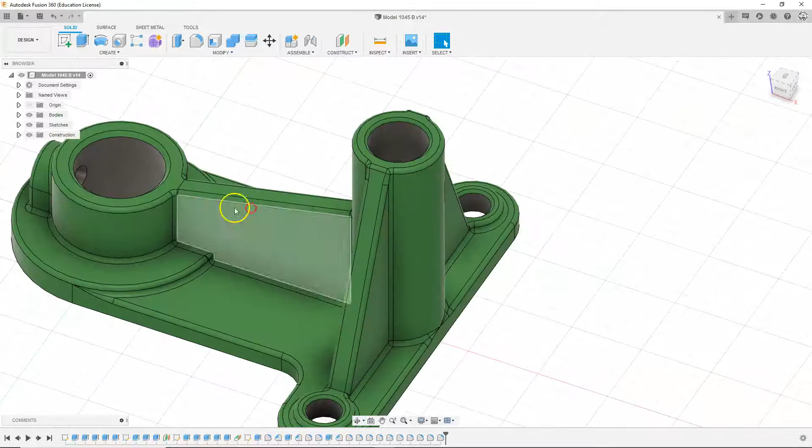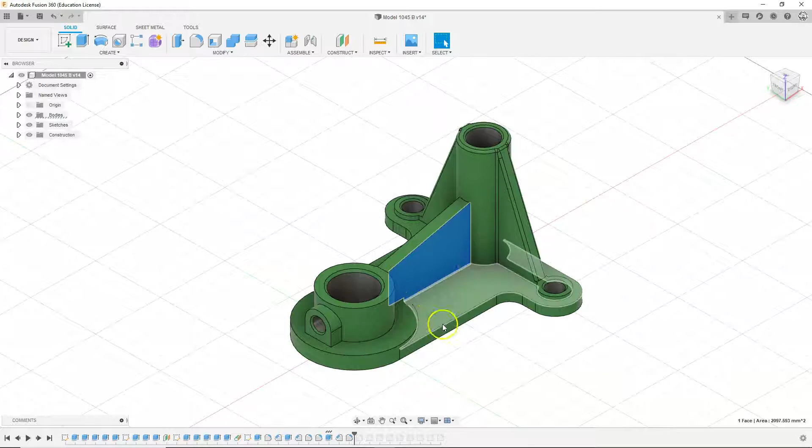One of the things I didn't like about my first try was that I couldn't get these fillets right, and you notice they're a whole lot prettier now. So what I did is I went back in and deleted all of these fillets back to the beginning. I still did these all the same way on this tower, but instead of clicking this face and adding fillets to everything on that face, it kind of does everything, and the computer tries to calculate all those things.

So what I did is I just did this vertical fillet right here, and then I went through and put all these other ones in, and it worked a whole lot better. But I got stuck again when I tried to do other things.

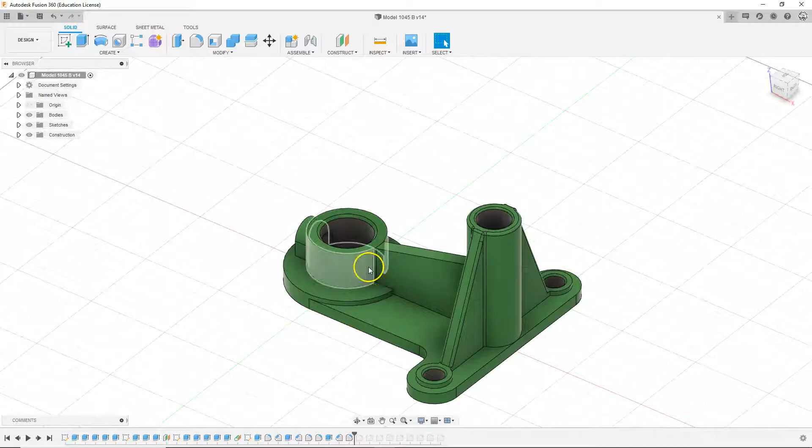So I found out that it's helpful to do all of these vertical fillets between this one and this one. So I did that one, and then the next one I did was back here, and that's the one that I just did, those two. You can roll the timeline forward, and I did all of these.

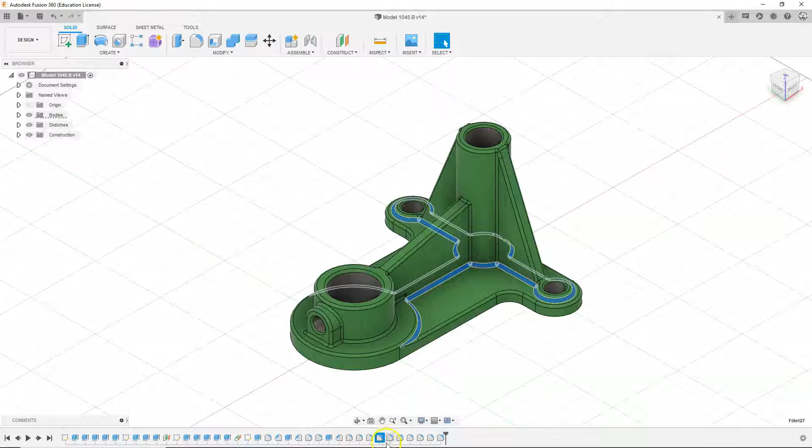So I started doing all the vertical fillets, and then I went in and started adding some of these horizontal ones, some more horizontal. It turns out that when I did all these horizontal ones after the vertical ones, nothing freaked out and threw a fit.

So I got my fillets a lot neater by doing this triangular one, like I showed you. I did these kind of vertical ones first, then the top, and then all the other horizontal ones. So that was a huge help.

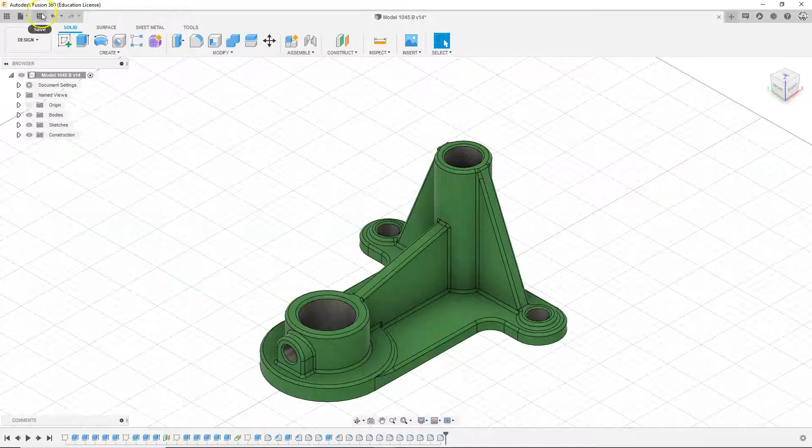The next thing that I worked on was getting the drawings better. So we'll go ahead and start this drawing from design and hit OK.

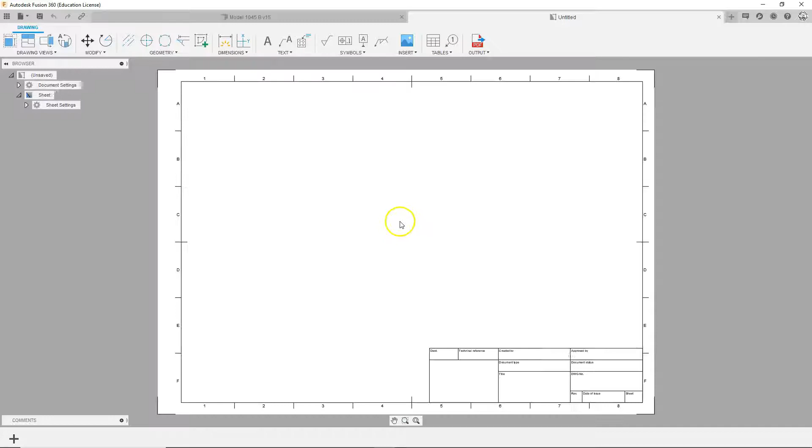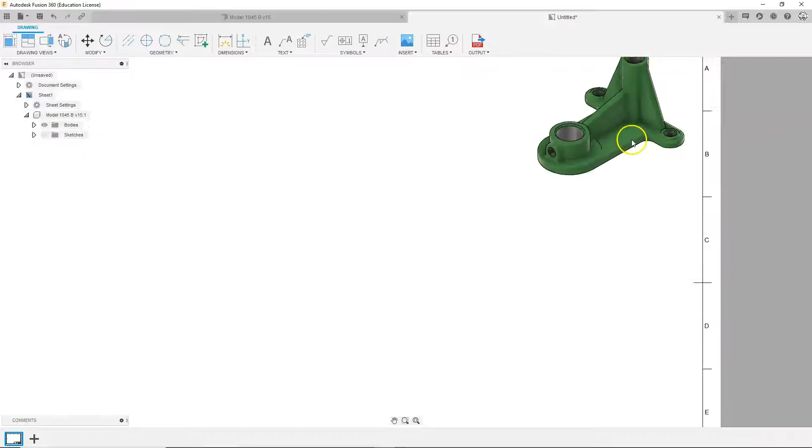I changed up the way that I positioned the drawings. It's just not going to work the way they have theirs in the example. So we'll still do our northeast shaded for our first one. But theirs has got all the fillets, and right now our tangent edges are off. So if I hit OK, and that goes in there, you can see that a lot of these are just smooth, and there's no edges. So we can click on full length fillets, and that adds in where all those fillets are.

The next thing we can do is click on our base view. We'll put in the top view. We'll stick it right here. And I was doing it right the first time, I just wasn't patient enough.

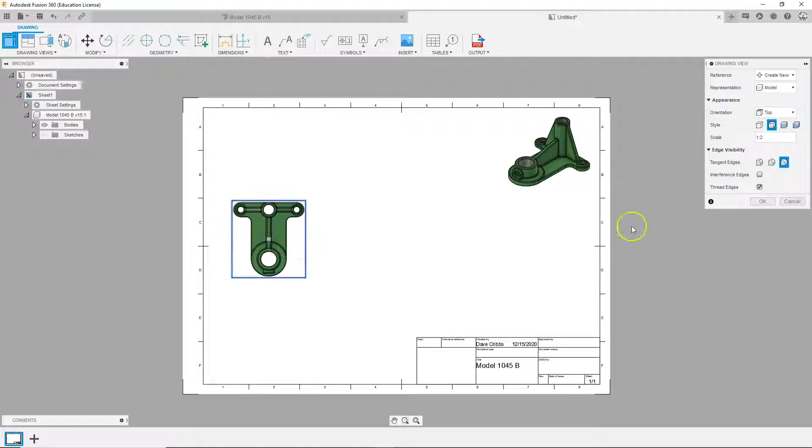When you click rotate, you have to select the object, and then come up here to tell it to transform. I did the center as my base point, and then I wanted to rotate this way, but whenever I'm over here, it sees that as 0 degrees. So I just had to keep rotating around, and I had to pause for a second to let my graphics card catch up. And that's the orientation that I want.

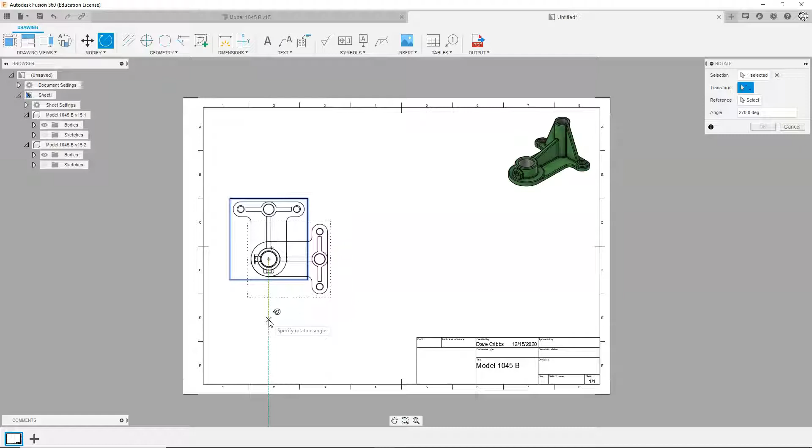So I'll click and put it there, and then once it's placed, you can click and drag it wherever you want to.

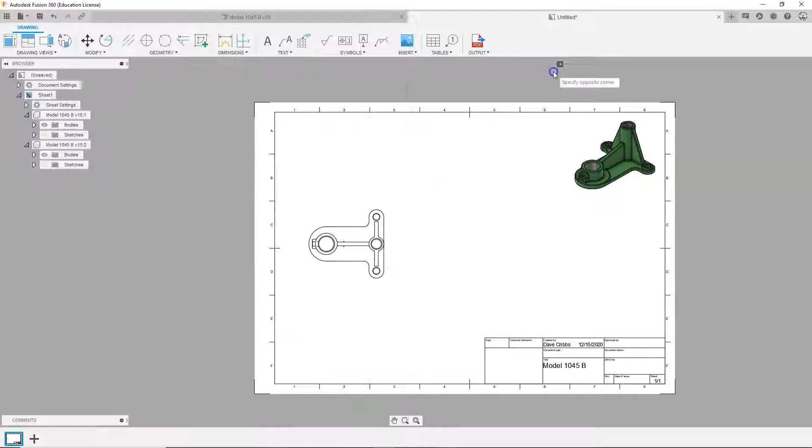The problem that I have now is that I'm missing a couple of these circles on the original drawing. The original PDF has got several more. Let me go half screen now. On the original PDF, if I look at this top view, you can see I've got all sorts of circles, and then on mine I'm missing a bunch. And the problem is...

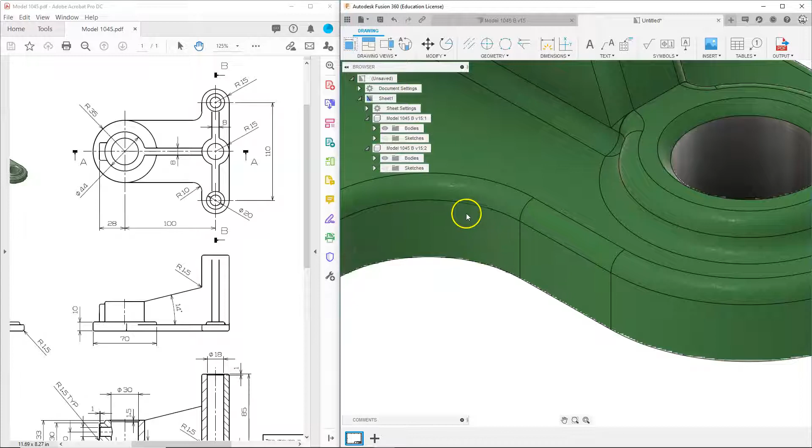...that on these fillets, this is the top flat edge. This is rounded over, and then it meets the other fillet the other way. So there's no vertical face, so Fusion doesn't see that as an edge. It sees this as an edge, and we'll draw it in, but it doesn't see that as an edge. So when we're looking at this drawing, we're missing some circles.

So what we have to do is look here. This one is my original base view, and this is my next base view. And what I'm going to do is come down here to the sketch folder, turn sketches on, and turn on sketch number 1.

And when I do that, it adds in that circle, the one that's filleted on the top and bottom, so it's really smooth and disappears. Same thing right here - this is the top and bottom of those circles that get filleted as well, and they kind of disappeared on the original drawing. If I take those away, you can see I've got the chamfered top of the hole, but I don't have the top or bottom of the hole because it gets all filleted together and it's all nice and smooth.

So when I turn on this sketch, it does not only the body, but it also adds in the sketch. So you can see I've got my straight lines here that eventually I filleted out later on, but we're just going to have to leave those in.

So I think that was the biggest problem we had. A lot of folks were having problems as they click dimensions - they're having trouble getting the radius as they move their mouse. It doesn't lock on to that radius, except every now and then you get lucky. All you need to do is zoom in a lot closer, and that should help put in your fillets.

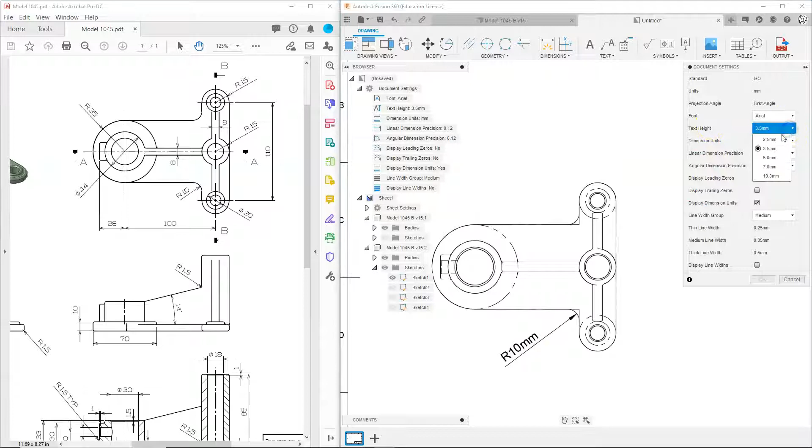If you're not getting millimeters, come up here to document settings and make sure this is checked - change units, you want this box to be display units. And I found as I'm trying to squeeze all these dimensions in, these numbers were getting too big, so I changed my text height down to 2.5 millimeters. When I made these a little bit smaller, it was a little bit easier to fit things in.

Okay, and then with that, you can keep adding in more base views.

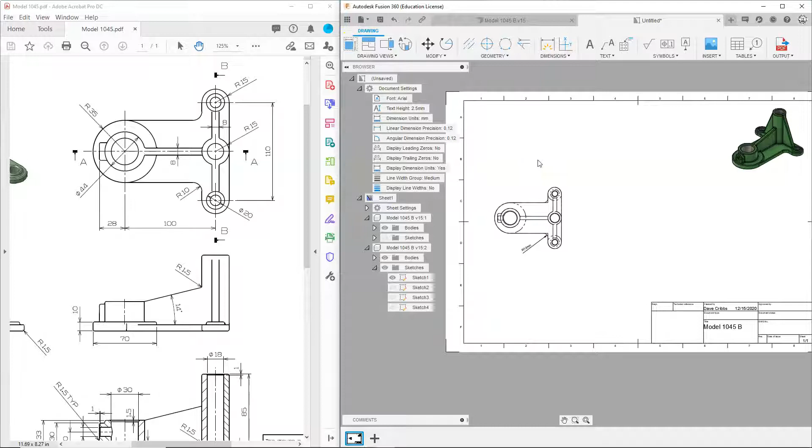So this time - oh no, this is where I want to do it, sorry. That's the front view, the right view. We can put it down here and say okay, and that's got hidden edges.

And in their drawing, they don't have that, so we can go ahead and just do visible edges. Now, once again, it's kind of missing that vertical line. That came from an extrusion, so I can't do the same trick here where I turn on sketches - that's not going to help us out.

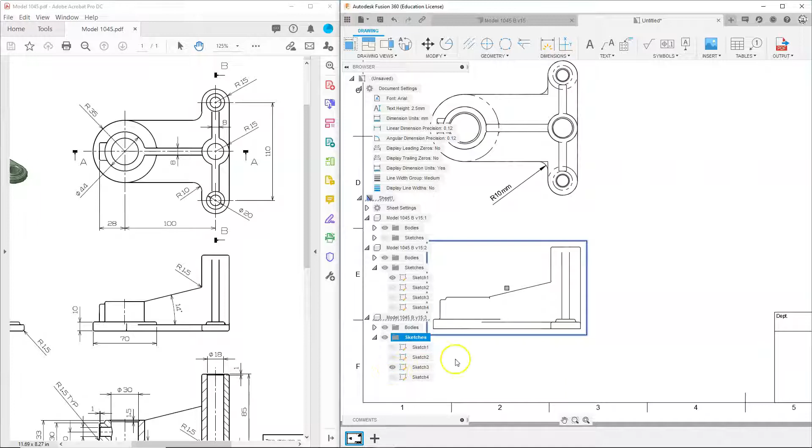It's going to put those lines in, and here it just puts way too many lines in, so I don't think that's helpful. So we just can roll with that one.

The sketch up here will be the A to A section. The one over here will be the B to B section. So I can do that real quick.

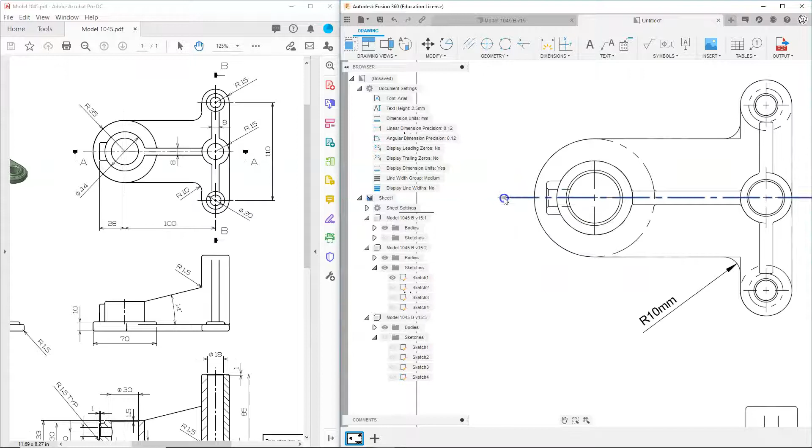Let me put the center marks in my circles, and then I can do the center line - go from this edge to this edge. Get out of the center line tool, and then I want to extend it, make sure it extends all the way past my body. And once I've got that large arrow, I can do the section view.

And we go from this point to this point, hit the check mark, and then I can come up here - and that's my section view.

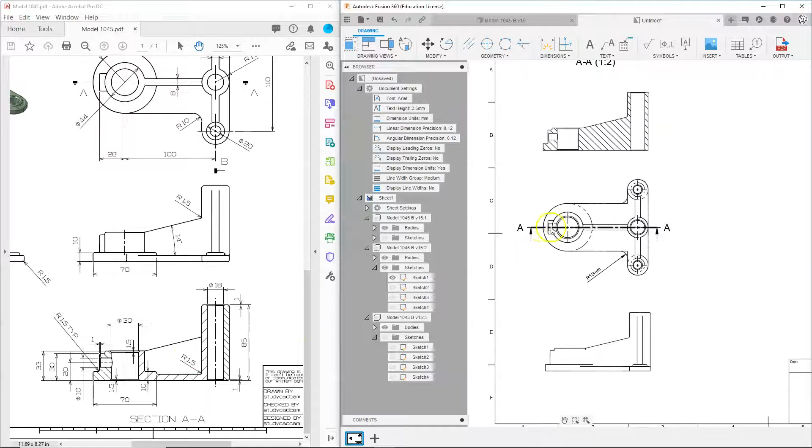Okay, theirs doesn't have this shaded, or doesn't have hatch marks in it, but I think that's wrong. If this AA is going through the center, like they're right here, then that should go through that centerpiece, and that centerpiece is most definitely solid. So I don't know why on theirs it's not showing up with hash marks - it absolutely should. So I'm good with this.

That's our AA drawing. I can do the center line - same thing, I'm going to pick one edge, then another edge, and it does the line. I'll hit the escape key on my keyboard to get out of that tool.

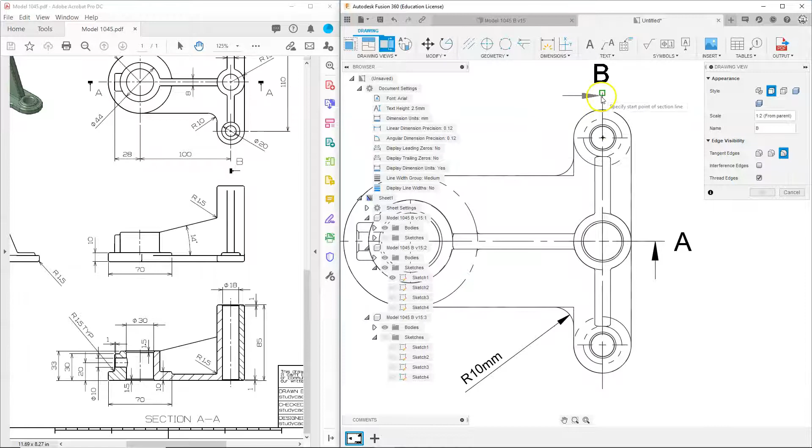And then I will select that and just make sure it goes a little bit further - the line's got to go all the way through the model for the cross section. So then I can grab, and this is my parent view, and grab those two edges of the line and hit the green check mark.

And then over here will be my other view. So those are - I've got these two cross-section views right here, AA and BB.

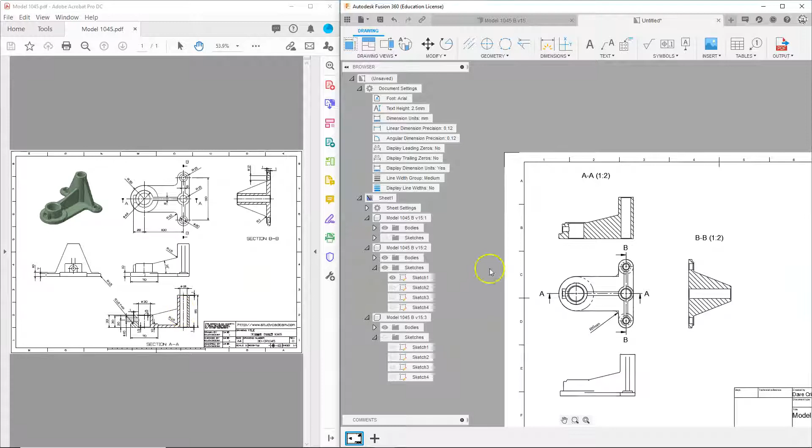I've also got the top view, and this side view, so I need this front view. We'll put our last base view in and go ahead. I'm going to put it down here so it kind of matches up with this one, and stick it right there. There's not a ton of dimensions on that one. OK.

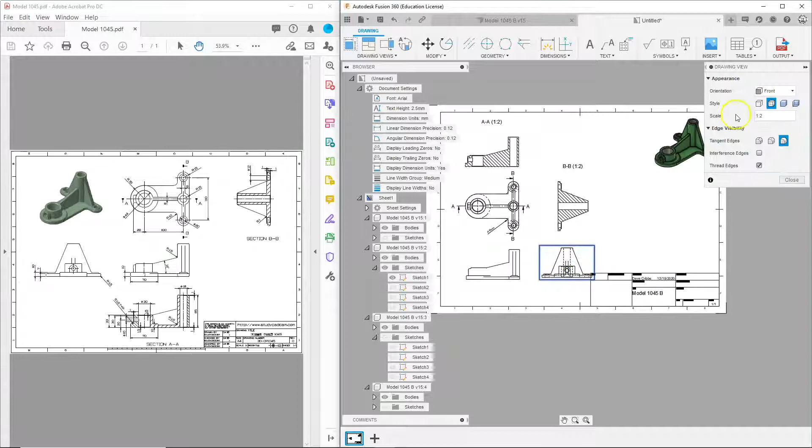Same thing, they only did visible edges, so I'll match that. There's only a couple of those as well. You can move these up a little bit to give yourself more room, but you want to try to have your views lined up as close as you can.

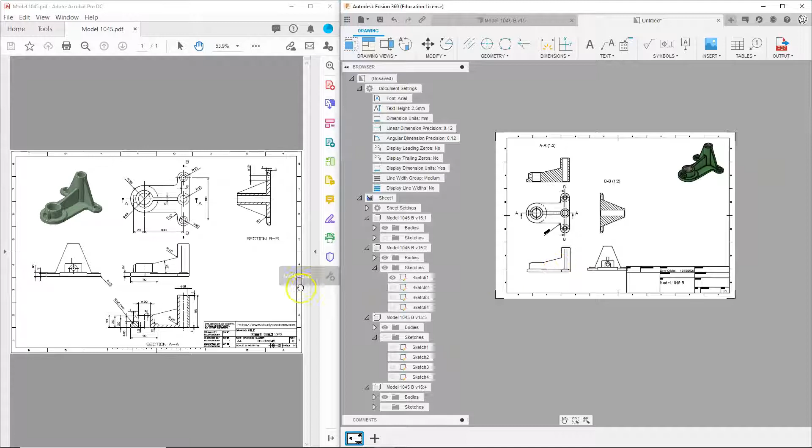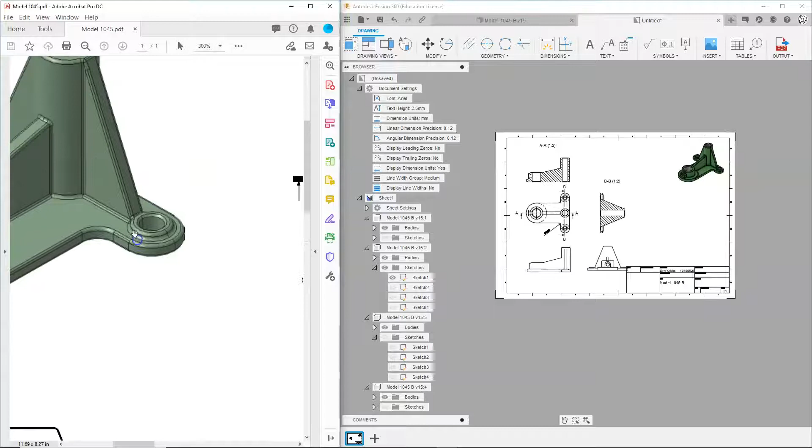The only thing I did really different on this sketch - everywhere they've got all the fillets as 1.5 millimeters, but all of a sudden right here at the base of this thing, they say it's 1. I don't know if that means just, and they're drawing so terrible, I don't know if it's 1 or something else. I just left that as 1.5, the same as everything else.

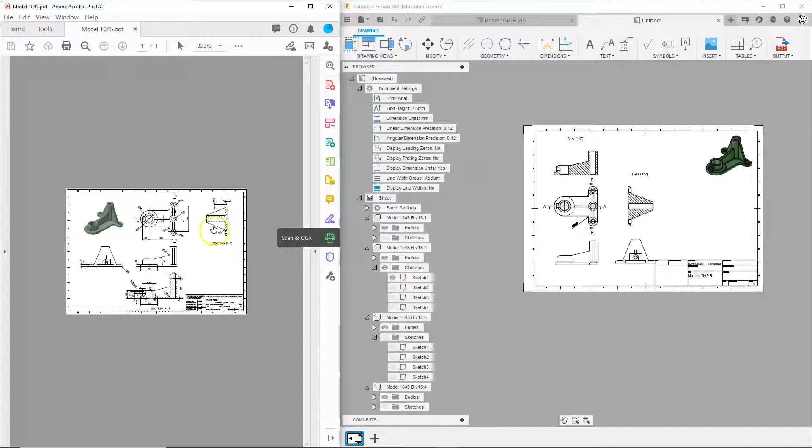When I redo this drawing like this, that 1 is going to go away. So if you did it 1.5, that's great. If you left it as 1, that's great. If you want to change it to 1.5, you can do that as well.

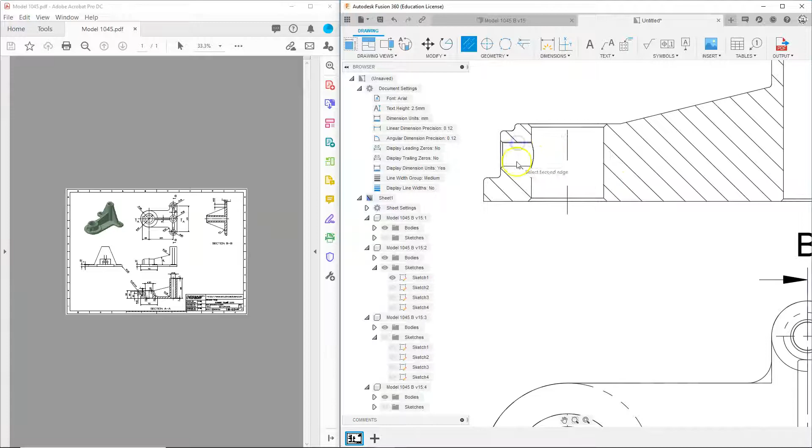Except for doing all the details, I'm not going to go through and put every dimension on here. Some of these are a little tricky. You can put the center lines there and here for those. I know this edge was a little bit hard.

So I'm going to get the 20 right there from this edge to, I think it's the top. No, it wasn't the top. I remember it was 30.

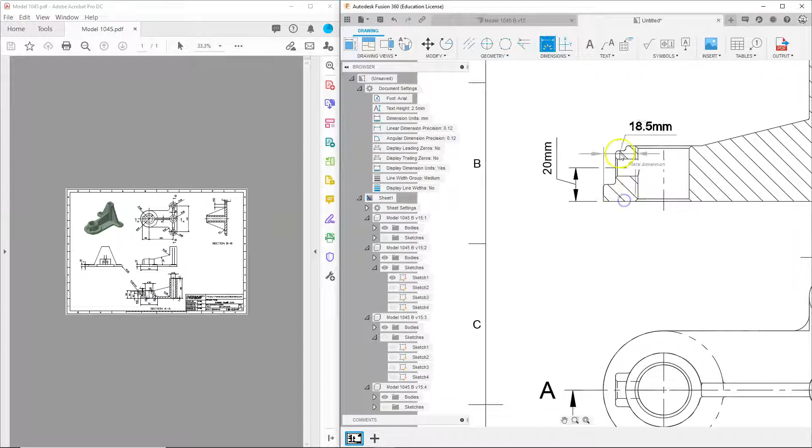So the biggest problem is that this is so small, it's hard to get what you want. So I just zoom in really big to get what I want.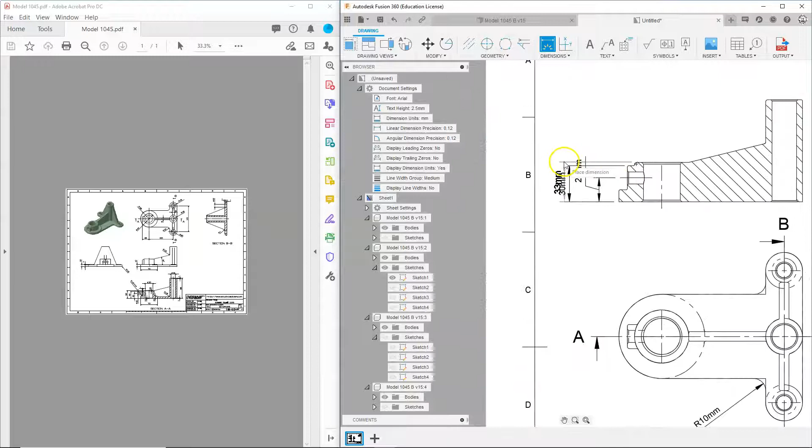That's 30, and I remember from here to the very top is 33. So once again, I want to grab that edge. Just a lot of zooming in to get specifically what I want.

I think they had another one where they had this diameter. I'm going to place that, but grab this 10 and kind of move it down here where I want it. This just has a 10 millimeter.

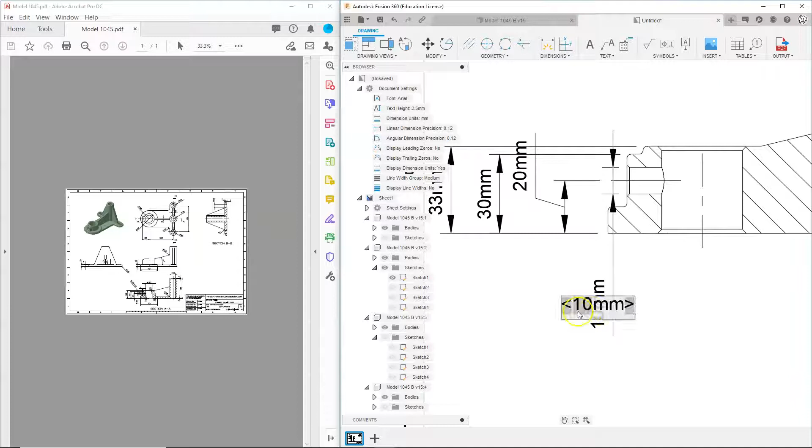If you want to add a diameter to that, you can double click the 10 millimeters, then use the arrow keys on your keyboard to get the cursor right there at the front. Insert - I double clicked to get that editable field, then click on the insert symbol, and that's the diameter symbol. Close, so I can get the 10 millimeters like they've got on here.

So they got the diameter 10, the 20, the 30, and the 33. So I've got the diameter of 10, the 20, the 30, and the 33.

Same thing, you can zoom in to get these chamfers, try to put them out of the way. There's one here at the bottom that they've got marked as well. It's going to put them where it wants to, and I just spent a little bit of time clicking on them and then dragging that gray rectangle to kind of get them out of the way a little bit.

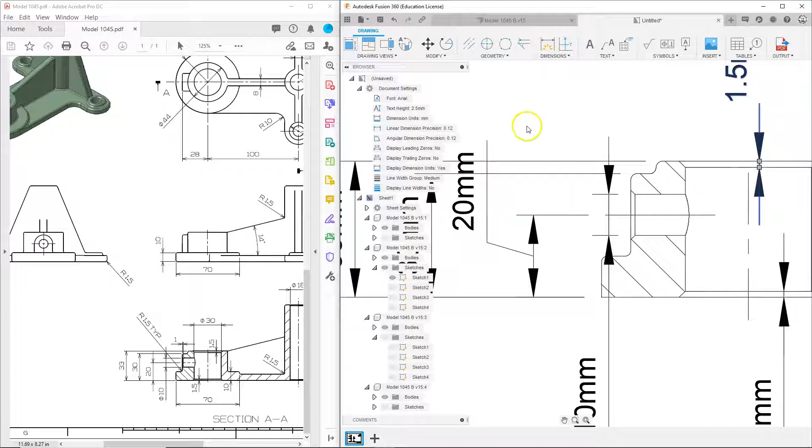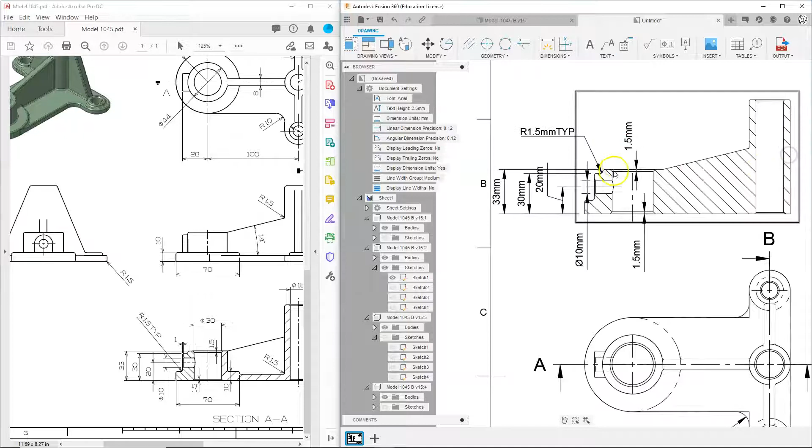You can add in a little text box right here. Zoom in on that edge and come up, and that's where you can type in capital R, 1.5 millimeters, TYP means typical. So if there's a fillet that's not labeled, you can assume that it's 1.5 millimeters.

They've also got this diameter of 30, so we'll go ahead and finish putting that in. I'm going to grab this side and that side, and once again, it gives me just a plain old 30. It doesn't give me a diameter of 30.

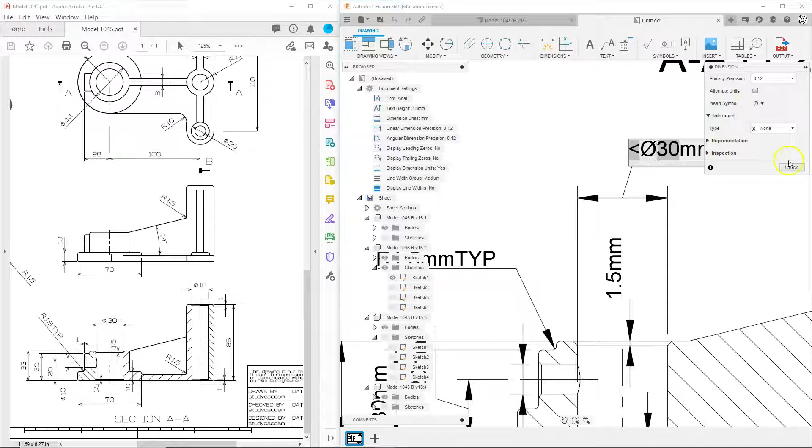I'm going to double click that and then put my cursor - sometimes you have to use the arrow keys on your keyboard. Got the cursor at the front, same trick, insert that diameter symbol and hit close. So now it says diameter 30.

So I've got all these. I need to do that little 1mm chamfer on here. So I'll grab the dimension tool, and once again, I'm zooming in super far.

1.5, I need this 10 back here. On mine, since it's got the hatch marks all the way through, I can't do the 10 on this side, so I need to do the 10 on that side. I'm talking about this thickness 10 right here. I've already got that 10 diameter there.

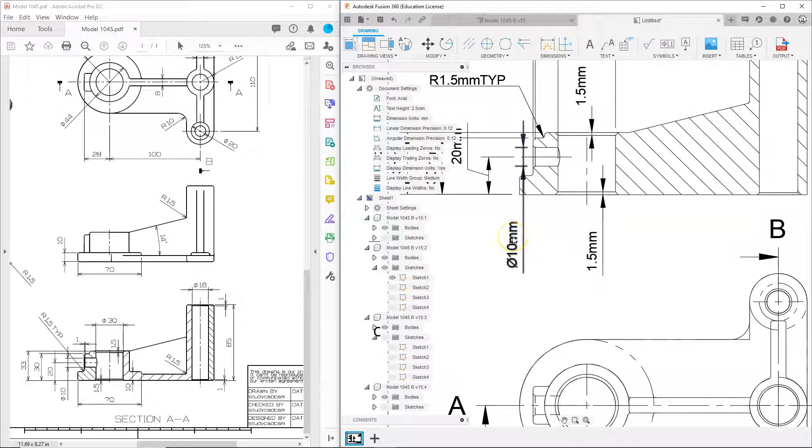So let's see, when we get out of the dimension tool, if I can't move this over a little bit. I'm going to click on these gray boxes and move it over there. Now it's kind of on top of that one, so I'm going to click it again and move it a little bit more towards the back.

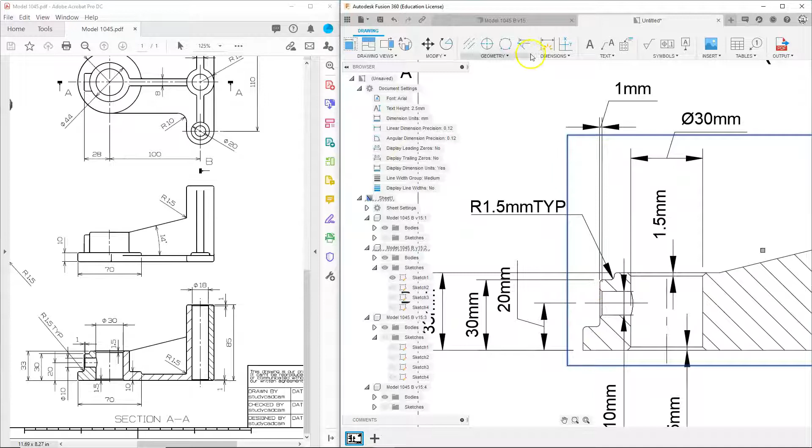So that's a diameter 10 for that. And now I should have room to squeeze in that from this edge to that edge. Once again, it's going to put it on top of something, so I'm going to line up the arrows where I want them. Then I'm going to hit the escape key, grab that 10 and grab this gray box and put the number over here.

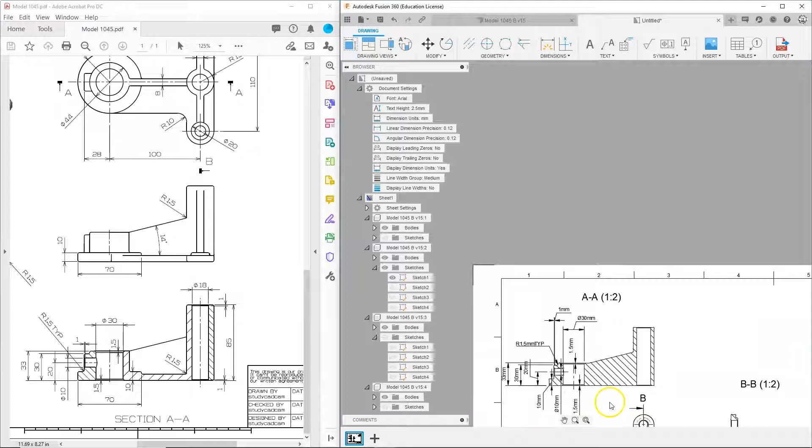So it's a very, very busy drawing, the same way it is over here. I can come in here, we'll just finish this. We'll finish this top one out, and then I'll stop the video so it's not going forever.

I want you to give the best shot you can of getting all the dimensions in there, but not getting every last dimension is not going to kill your grade. I'll take a point or two off here or there if you're missing one, but don't.

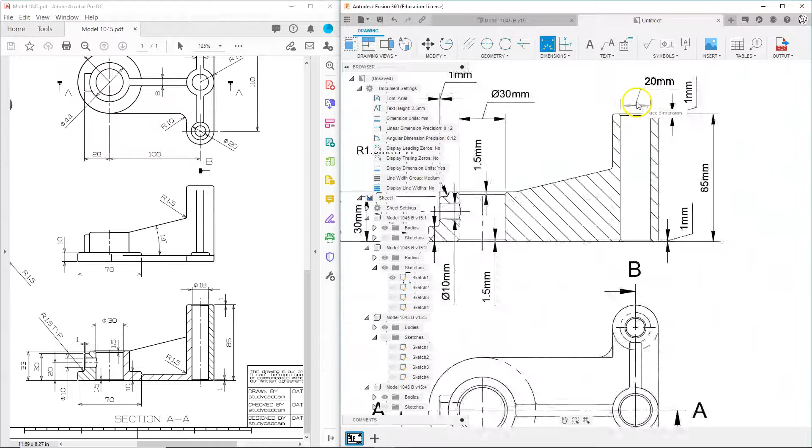So that says 20, and it says it should be 18. So I might have this wrong in my model. Let me double check the drawing. Certainly looks like that inner side - inside is 18 on this tall one. So let me go back and check my model.

Let me go back to my sketches. That's 30, this is 20, so the inside of that needs to be 18. This is where Fusion is nice - after all those hours of work, I can just type in 18. It'll change that. I finished that sketch.

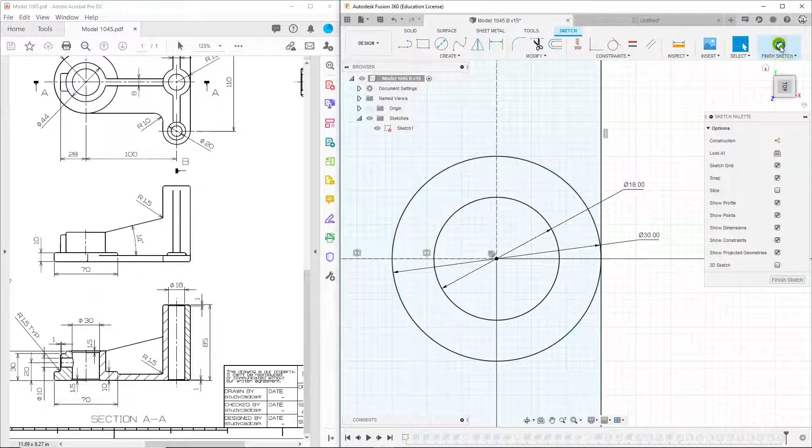I'm going to kind of go back, and everything else, it doesn't throw a fit. I can save that, now that that diameter is 18. And once this updates to 16, I can come over here. It tells me this is new, and instead of this being 20, when I update my drawing, I really hope that changes to 18.

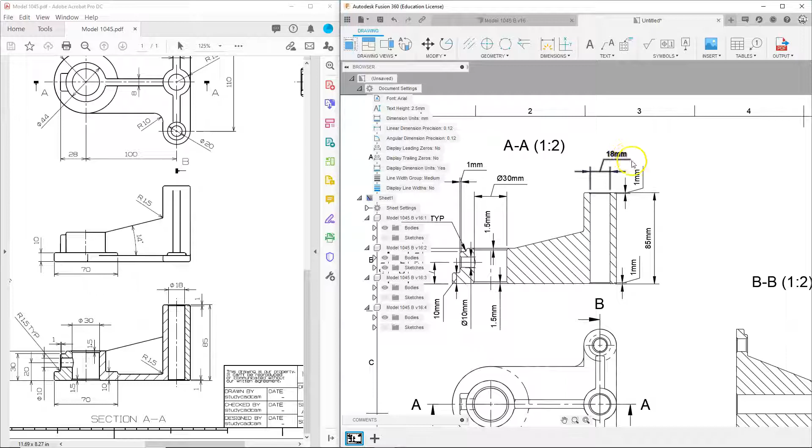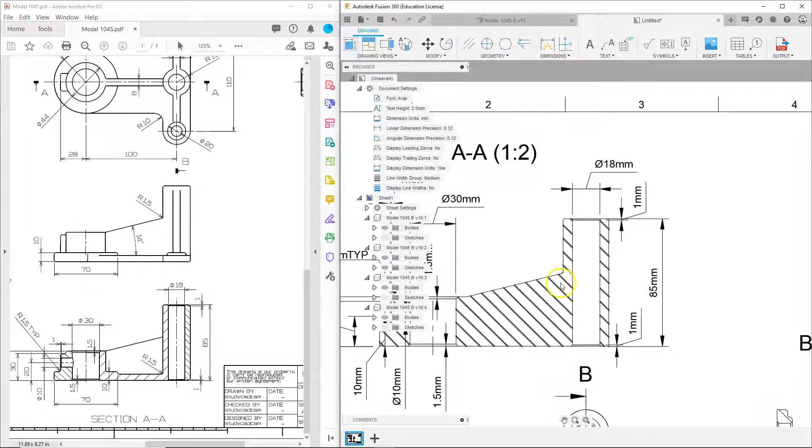There you go. Once again, I can double click on this and put my cursor at the front using my keyboard arrows, and then put the diameter symbol in front of there. That way it matches the 18. So I got the diameter 18, the 1, the 85, and the 1mm. I think as busy as that drawing is, I've got everything off of that drawing.

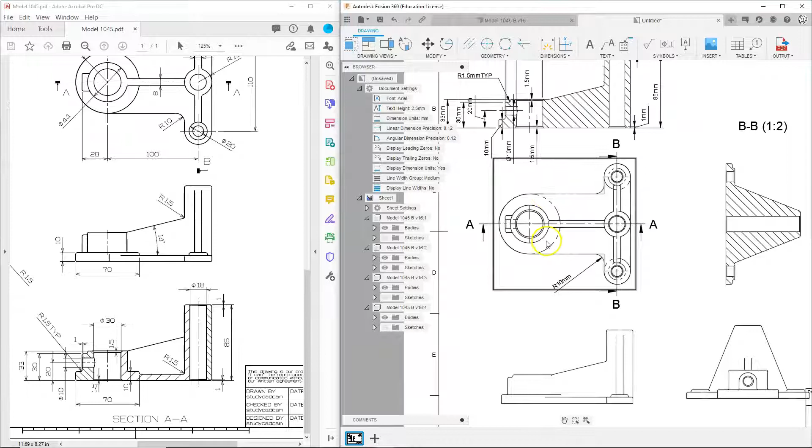So with that, you should be able to continue using those steps to get all the other dimensions. Big thing is to add these sketch lines in. I had to turn on sketches and then specifically turned on sketch 1. I changed my text height from 3.5 to 2.5 millimeters, just so I can squeeze all these things in.

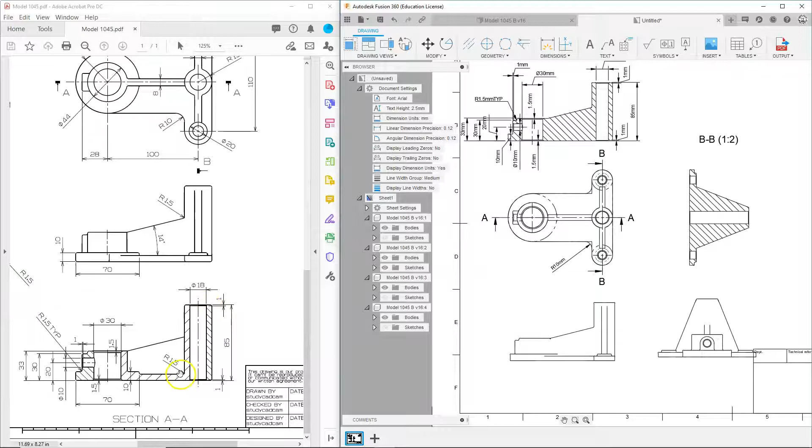And then the only thing that I purposely changed was on this drawing - it says that that's a radius of 1, whereas every other fillet on this thing is 1.5. So I just made them all 1.5. I don't know why, but sometimes that's just the way they want it.

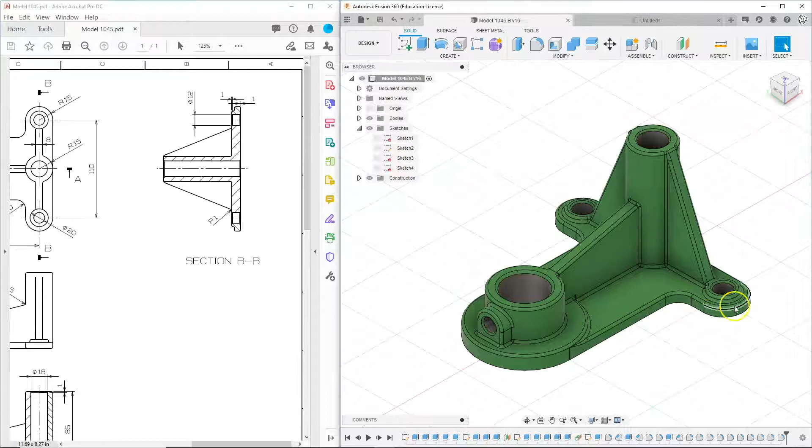I could come back into here, find that one fillet right there, and maybe I missed it right there, so I'll just go ahead and do it. I'll hit the fillet command, grab that line, we'll grab the other one.

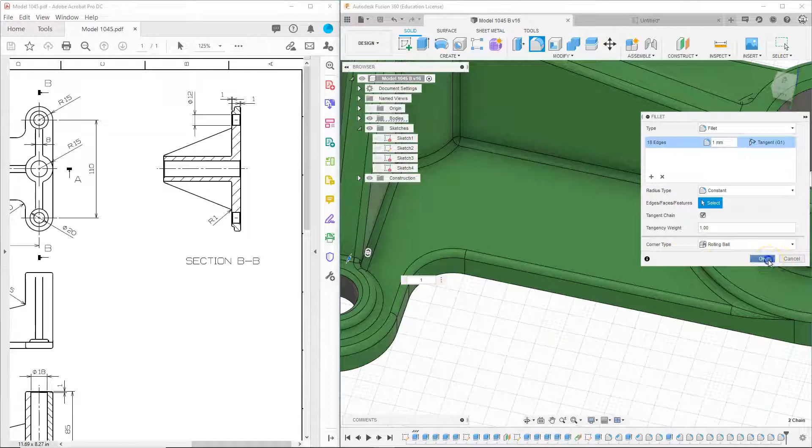And we'll make those 1mm fillets, playing by the rules that the drawing said to. So now that's a 1mm fillet. I'll save it.

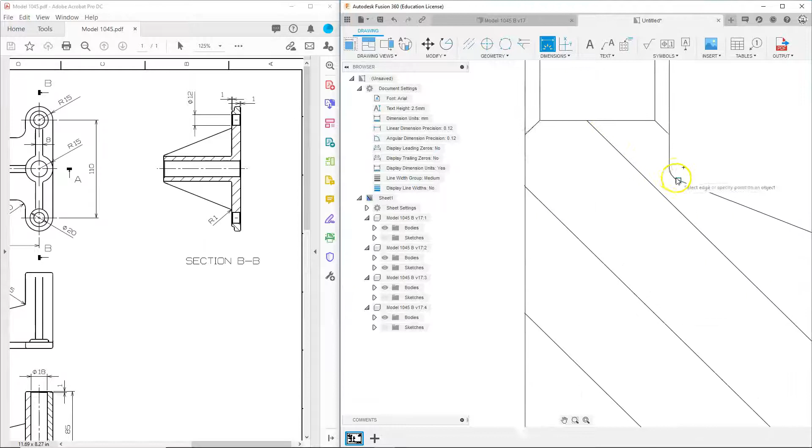And then I can come back in here to my drawing once this updates to 17. I can update my drawing. And then now when I come in here, in this BB section, if I try to grab that fillet, it's so tiny I can't grab it.

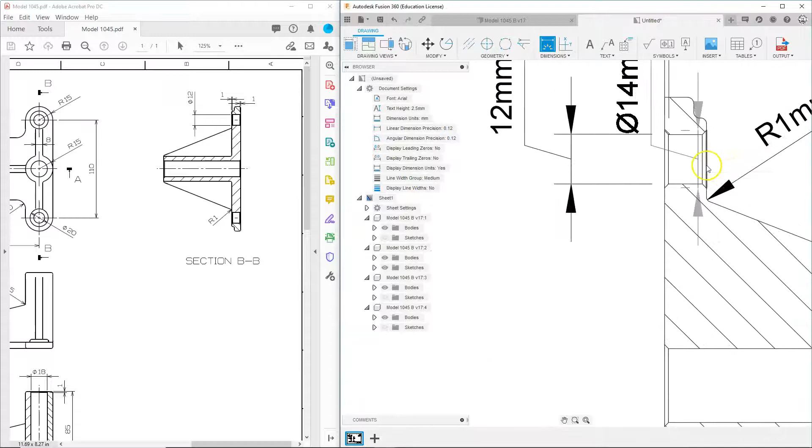I've got to zoom in a mile, and now I can put in that single 1mm fillet. I think the rest of the dimensions are doable. I don't think there's any others that are too difficult. I can put in this 12 and do the same trick I did editing that to put the diameter symbol.

I can grab both of these for the 1mm chamfers on both sides of that. And then I've got the R1, they put it down here, so let me do that too. I'm going to try to put the dimensions as close as you can on both drawings so it's easier on your teacher to grade.

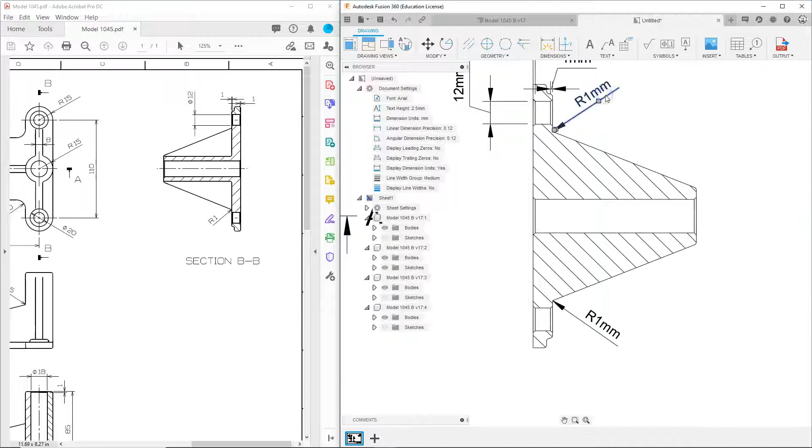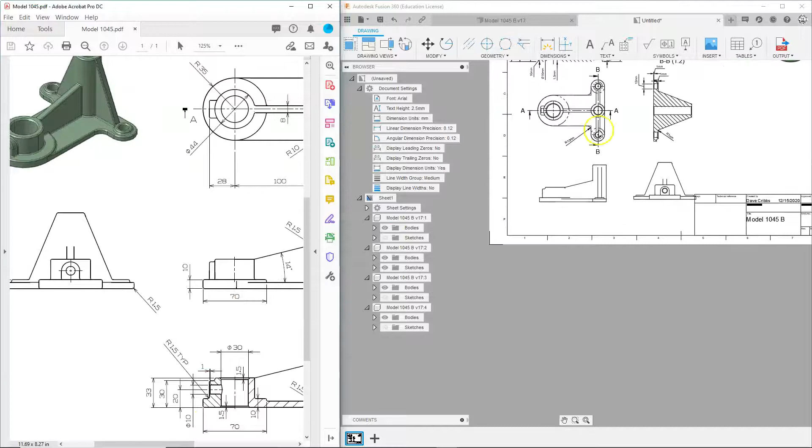Thank you very much. Okay, so I got that one done. And then the last part would be to get these two. So if you want to stop watching the video, you certainly can, but I might as well. I've got 3 of the 5 done. So let's go ahead and just finish it.

Okay, so we got this one right here. So I'll grab that. Zooming in for that 1.5. That for the 14.

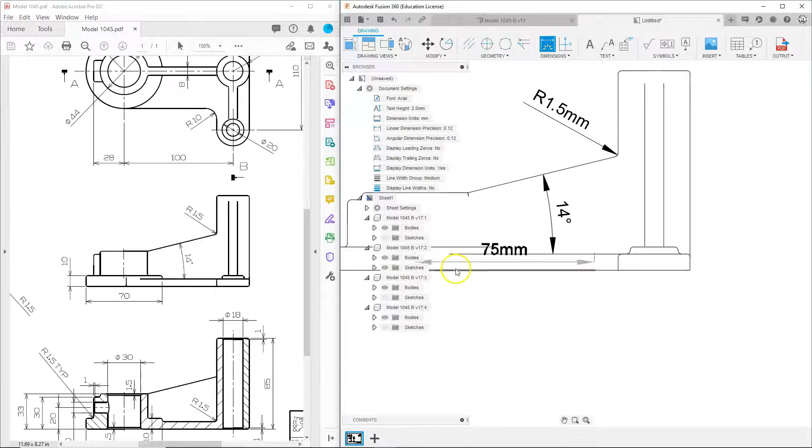Oh, I can't do that 70. Well, maybe I can. Nope. It comes out further, but this is where it hits that fillet. It kind of fillets out and then fillets out again this way, and I don't have a line right there. So I won't be able to do that line.

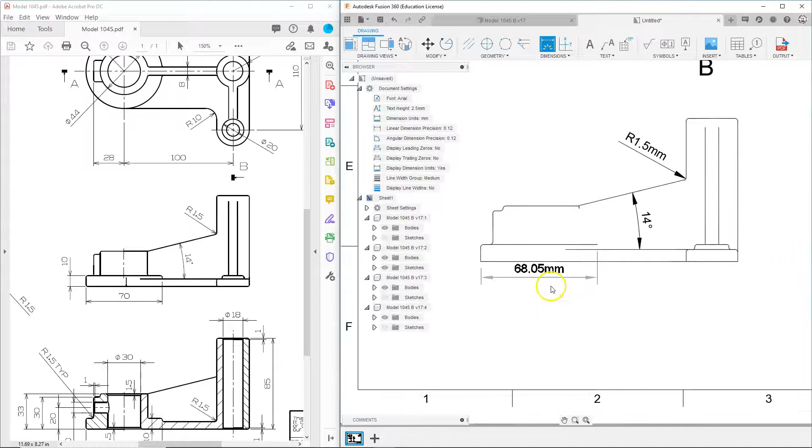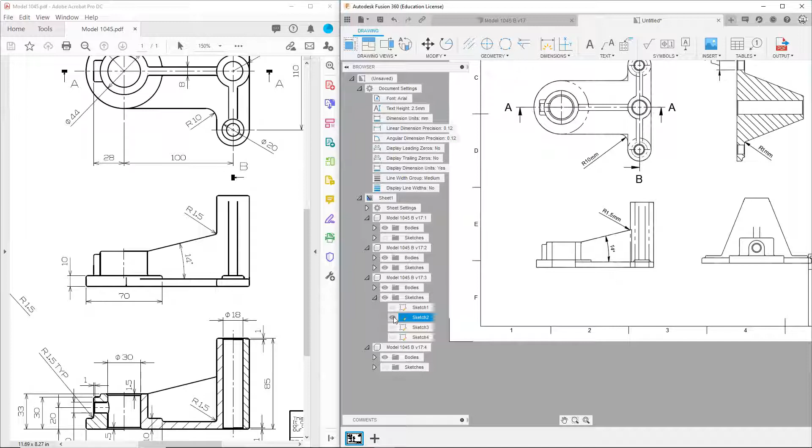This one, if I turn on the sketches, sketch 2 doesn't help. I don't know if that's helpful or more difficult. It kind of gives me that diameter.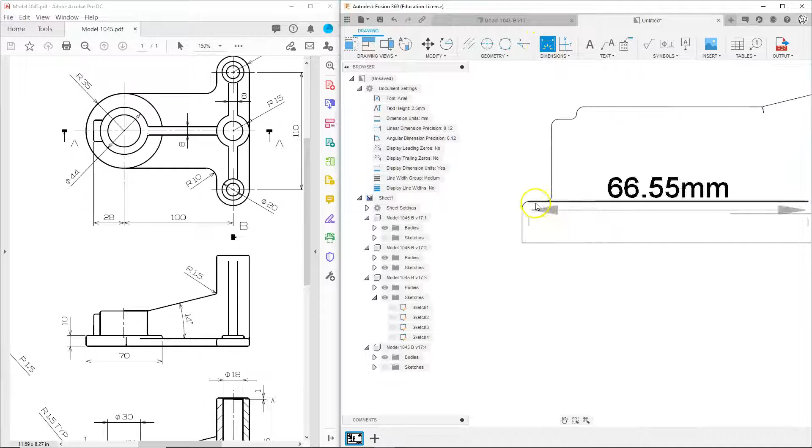And then this 10mm thickness should be easy. We can place that right there. So that's everything except for the 70. And then we'll come over to this one.

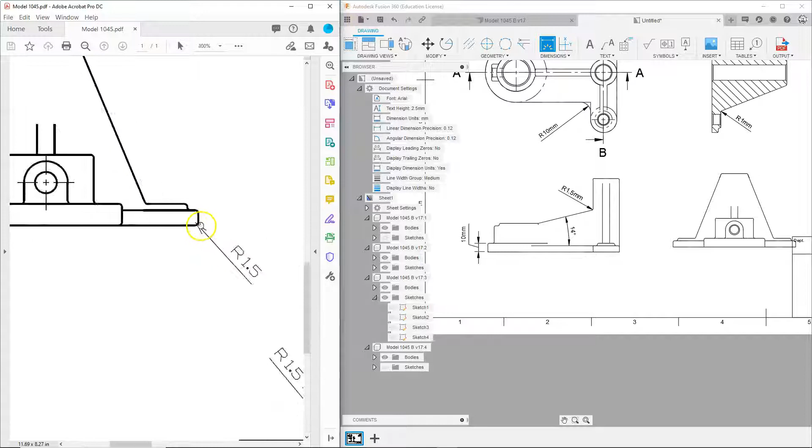You're killing me, Smalls. There, it shows that there's a radius of 1.5 along the bottom. And when you zoom in, I couldn't see the bottom. So go back to my model one more time. Hopefully this should just all happen in one fillet.

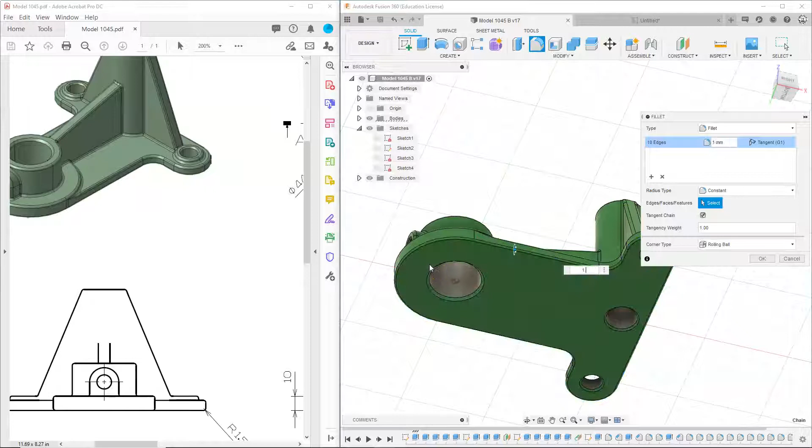As long as we're lucky. Now I'm going to flip it over, look at the bottom side, grab the fillet tool. That edge should be continuous, so we'll go 1.5 and put it in there. Once again, save this, wait till it updates to 18.

Come back here and I'll update my drawing. And now you can see I've got that curve. I'm kind of running into my title block over here, so I'm going to slide this over to the side a little bit. Getting a little close over here, but we'll have to live with it.

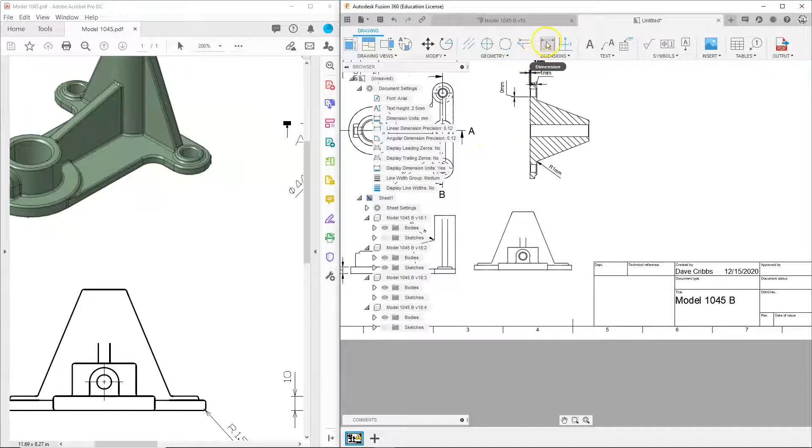Grab the dimension tool, grab that bottom radius, make sure it doesn't hit my title block. What else do you want on here? Just the 7 and 10 for the thickness. So that should be okay.

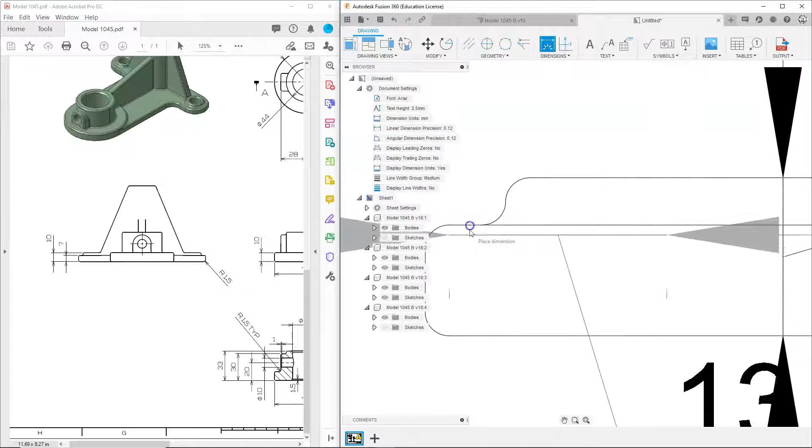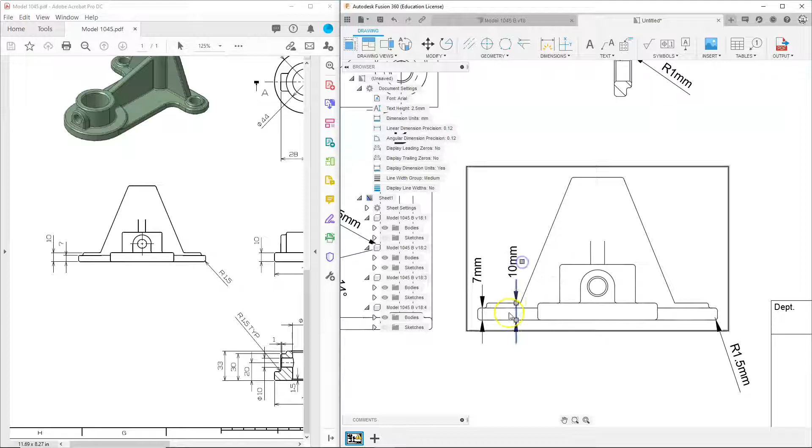I'm going to put it right there. We grab the 7. I'll have the arrows where I want them, and then I can hit the escape key, grab the gray block. I'm actually going to slide these over a little bit so it's more in the middle. There you go.

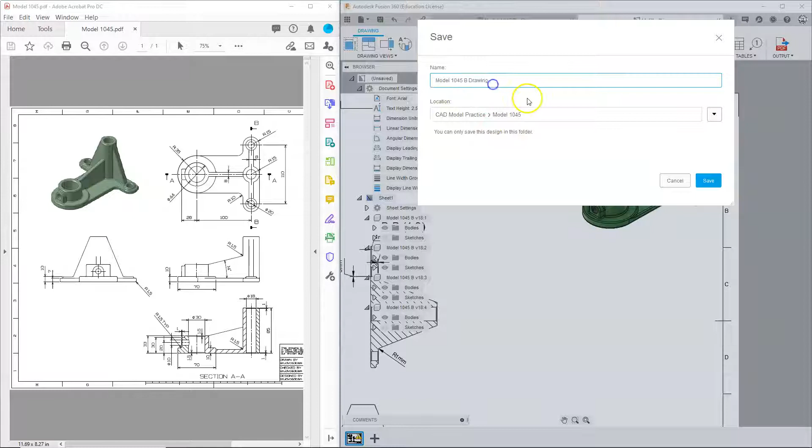Well, if I missed something, let me know. Otherwise, I think we got it. I turned on the edges so we can see all the fillets on there. We'll save this. Model B, we'll call this drawing B.